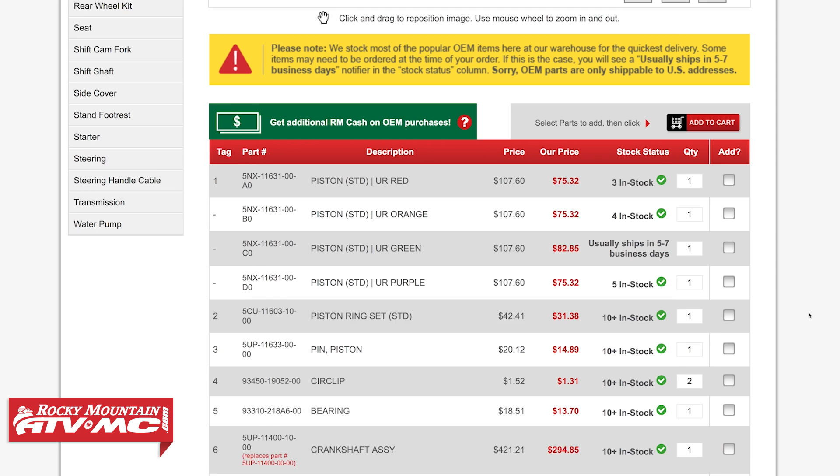The numbers on the diagram correlate to the numbers listed below. On this list under quantity, you may see certain boxes have more than one for a quantity. This indicates the amount of that part needed for complete assembly. If you only need 1 of maybe 2, you can click on the box and change the quantity.

You will notice in Yamaha diagrams that they don't specify left or right. For parts that are located on both sides of the machine, if you're unsure, look at the tag number. The smaller tag number indicates the left side and the larger indicates the right.

Looking at the stock status, you can easily see what is in stock. If an item is in stock, we have it in our warehouse and ready to be shipped. We do our best to stock as many parts as possible, but may not stock items that are rarely purchased. If you order a part that is not stocked, we will order the part immediately from Yamaha and ship it to you as soon as possible.

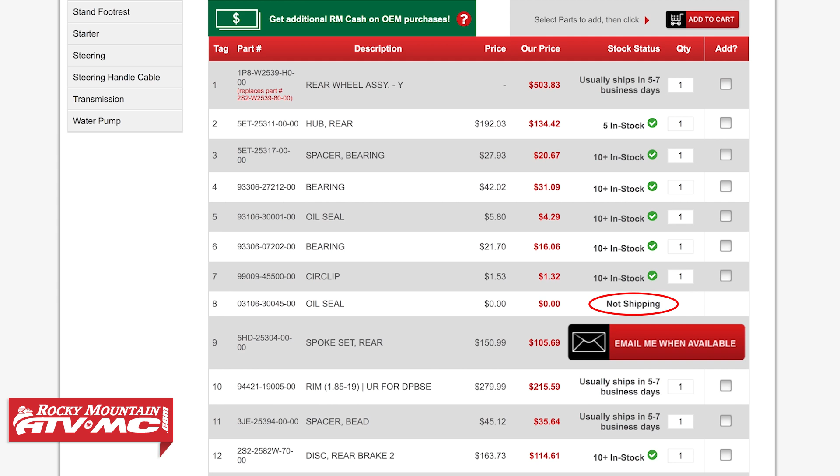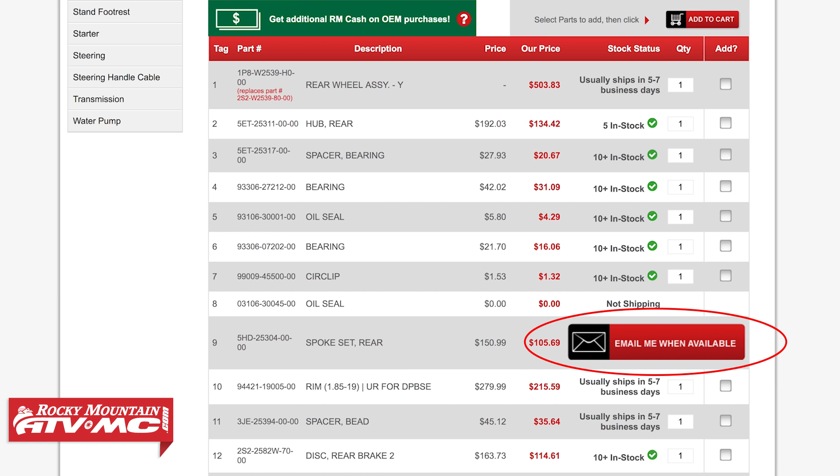We work hard to review each diagram to stock the parts that are commonly ordered. If we missed one, our software will recognize it based on sales and make it a stocked item. If an item is not shipping, this can be one of two things. First, the part is old and no longer made by Yamaha, or second, it may be a brand new part and not yet available. In some situations, there will be an email me when available box. This means that Yamaha does not have the part in stock and does not have an exact date of when the part will be available.

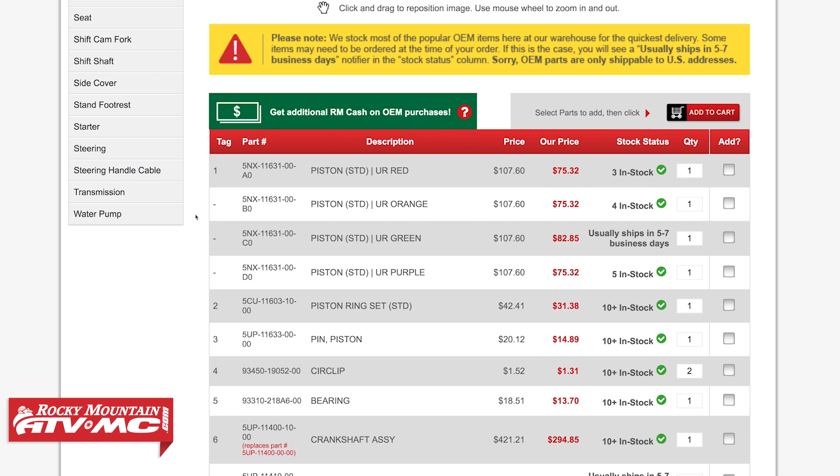Now let's talk about some commonly asked questions. First, two-stroke piston sizing. So if we pull up the 2004 YZ250 and look at the crankshaft piston schematic, we'll see that Yamaha lists 4 different pistons for this bike. In the part numbers they have A, B, C, and D, and each of those have a color assigned to them: red, orange, green, and purple.

Yamaha uses this system to best match each piston to its cylinder. You'll find a letter stamped on the back of your cylinder, and that is what piston they have matched with that cylinder. Unless you are ordering a brand new cylinder with a new piston, most experts would say that when replacing a piston in a used cylinder, your best bet is to go with the D or purple piston.

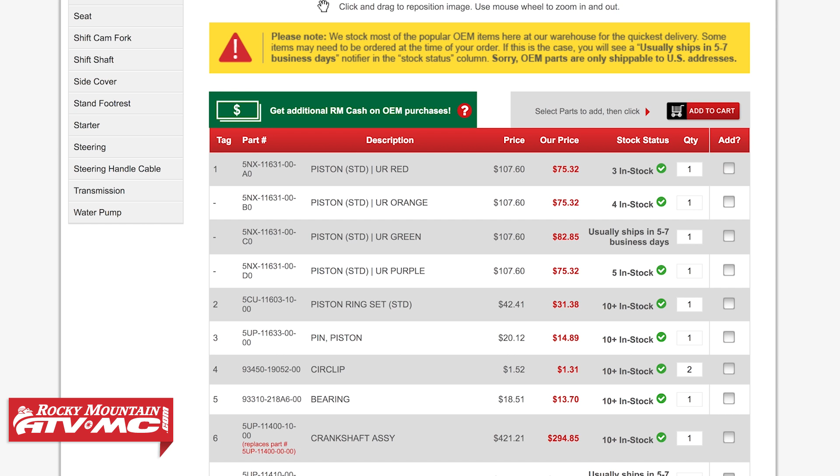Now another commonly asked question that we get is what is all included with the assembly? So let's take a look at the 2014 YZ450F cylinder schematic. So if you were going to order a new cylinder head for this bike, you would want to know what all is included with the head.

And as you can see, the assembly is going to have a dotted line surrounding it with a number 1 tied to it. Everything in this box will come included with the head. So the head itself, the valve guides, cam caps, dowel pins, and camshaft cap hardware. The camshaft caps are not available individually because they need to be matched to each cylinder head. Now let's jump over to a 2009 Grizzly 700.

This model has power steering and is green. If we pull up the front master cylinder schematic, we'll see that you can buy the complete assembly, which is number 1. Everything in that dotted line box will come included.

If we were just wanting to rebuild our master cylinder, we would look at number 2, the master cylinder kit. You'll see that instead of a box, Yamaha has a continuous line connecting each part to that number 2. Anything that the line touches would be included in this kit, so you would get the dust cover, circlip, piston, and seal. Everything needed to completely rebuild the master cylinder.

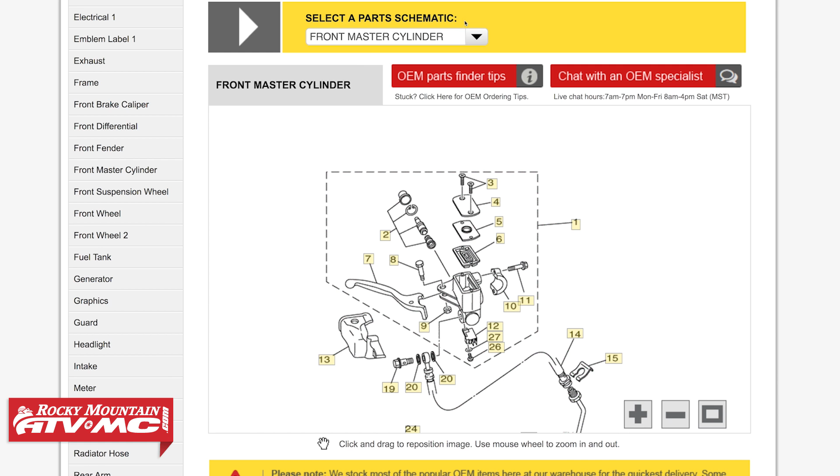Next, let's talk about color codes. If we jump over to the front fender schematic, we'll find another commonly asked question in regards to color codes for plastics and other colored parts. You can refer back to the OEM tips page, which we already briefly went over, to figure out the model number for your machine's specific color.

We already determined that our machine is green, but Yamaha is listing out all the color options for fenders, unless you have a special edition machine. For these machines, specific plastics are going to be listed for your machine only, and that is why it's important to choose the correct machine from the list.

Most of the time, Yamaha will list the color name in the part's name, like you see with the pastel deep green and the dark purplish blue solid, but on occasion you'll run into one that doesn't list the name. For example, if you had a black 2009 Yamaha Grizzly 700, you would see that it lists 3 different colorways for the plastics: green, blue, and SMJ.

Now by process of elimination, you would know that SMJ is the black fender for your machine. If you're unsure and you want to verify this, you can go back to the machines list and you'll notice that they only list 3 colorways for this Grizzly.

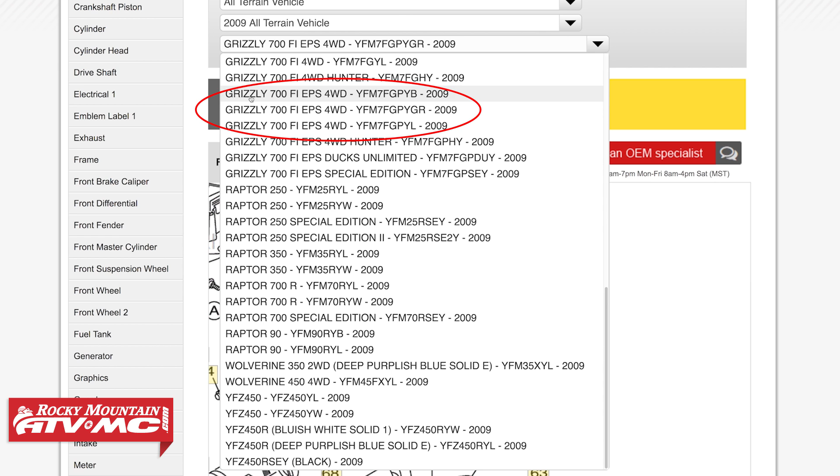Another quick question that we get often is with superseded parts. Now a superseded part is a part that has been replaced by a newer version. You'll see small red text underneath part numbers on the parts diagram list. This part will fit your machine just fine. Yamaha may have made a change to that specific part, so it replaced the old part along with the part number. The next question we get asked often is about standard equipment parts.

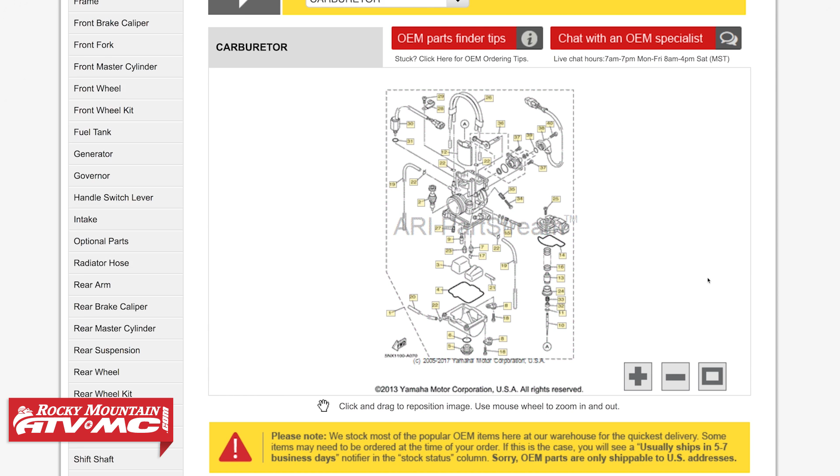So let's go back to our 2004 YZ250 and look at the carburetor schematic. On the schematic, we'll find the pilot jet, also known as the slow jet, which is number 9 on the schematic. If we go down the list, you'll see multiple options for jet sizes underneath number 9.

See how the number 50 is a standard jet, or the jet that comes standard on the bike? You'll also see the other options that run from 38 up to 62. So if you are rejetting your bike and you want the OEM jets, you'll know how to find what came stock and what other options are available. This also goes for plenty of other parts on other machines like the main jet, power jet, carb needle, leak jets, and pistons like we talked about earlier.

Alright everyone, so thanks for watching this walkthrough video of how to navigate Yamaha OEM diagrams.